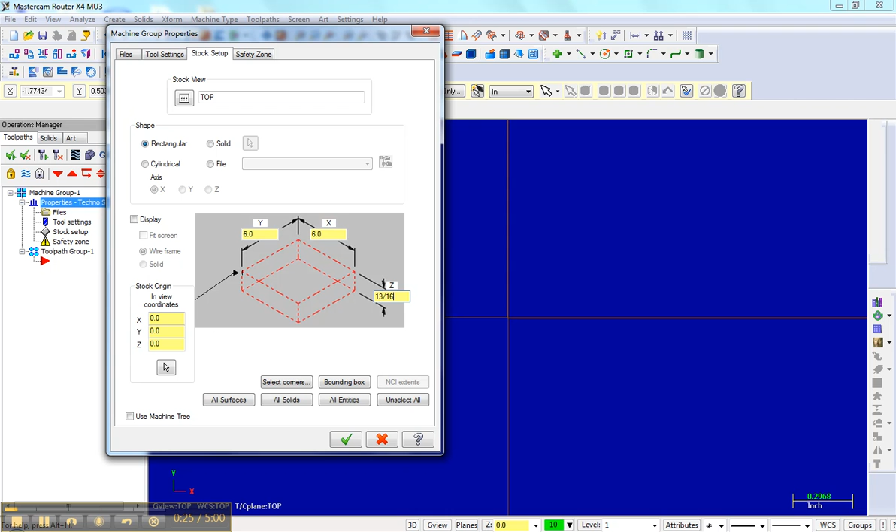Under properties, stock setup, I'm going to set my bit in my lower left corner. That's where I set it here. The dimensions of my board are 6 by 6, and actually that wood is 13/16 thick, so I'm going to enter that fraction. If I want to see it, I'll hit display.

Then I'm going to draw that. So I'm going to create a rectangle from the origin going up 6 and over 6. Snap in there, I'm done the rectangle.

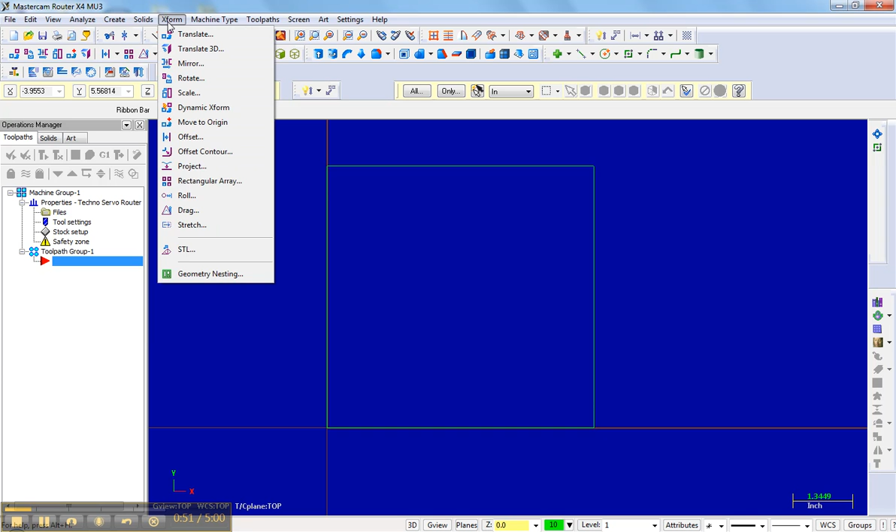Fit screen. I'm actually going to offset it so my bits stop a little bit before. So X form, offset, I'm going to offset a 1/2 inch, and I'm going to offset all these lines in here.

Then I'm going to create an arc from a center point. I'll snap it on that center point and draw the arc out maybe 3 inches. So I'll set a diameter of 3. Snap.

Escape, let me do that again. Here's my memory tool, so I'll go back to center arc. I'm going to set it at 5, with a 2-inch offset.

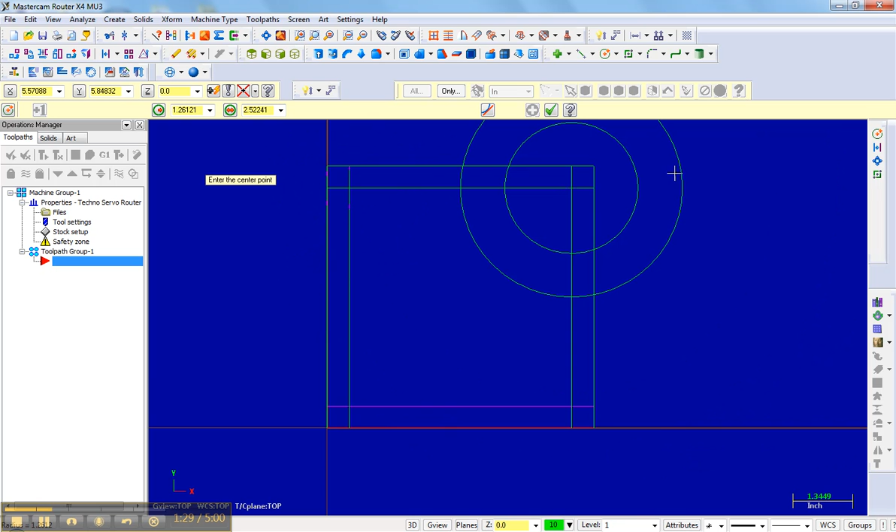Do that again, 5, this time it'll be 7. Nine. Let me do one more here.

Maybe 11. I think that's good, so I'm all done with my geometry.

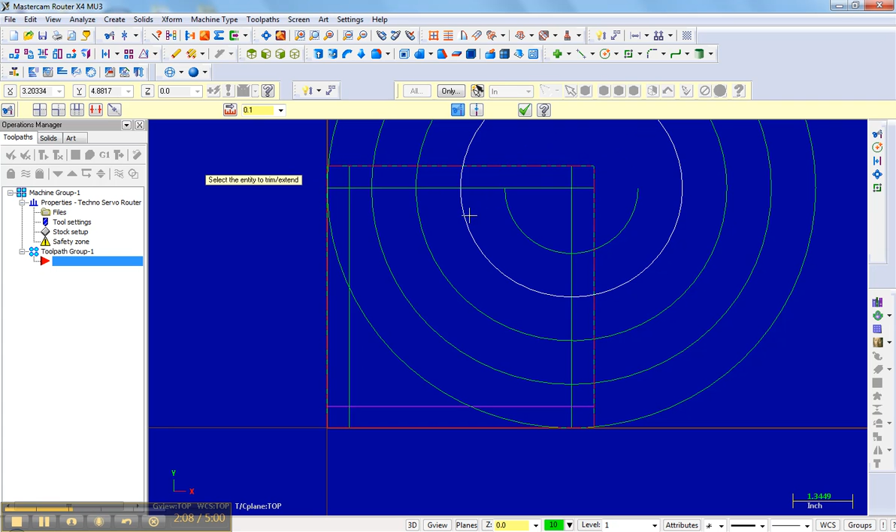Next thing I want to do is trim that geometry back to my offset line. So I'm going to trim this back to here, this to here, this to here, this. Then I also want to trim them to these offset lines.

When I'm all done trimming, I'm going to go back and erase all of these lines. I don't have to, I can leave them on here and not toolpath them, but I'm going to get these out of my way. And now I'm all done with my geometry.

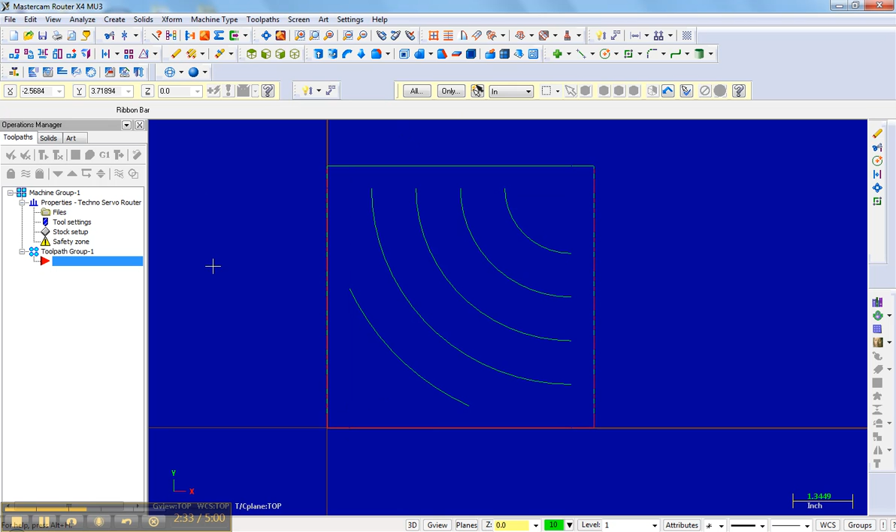Now I'm going to toolpath. I'm going to go toolpath, contour. I'm going to do a partial contour, and I'm going to start at the top.

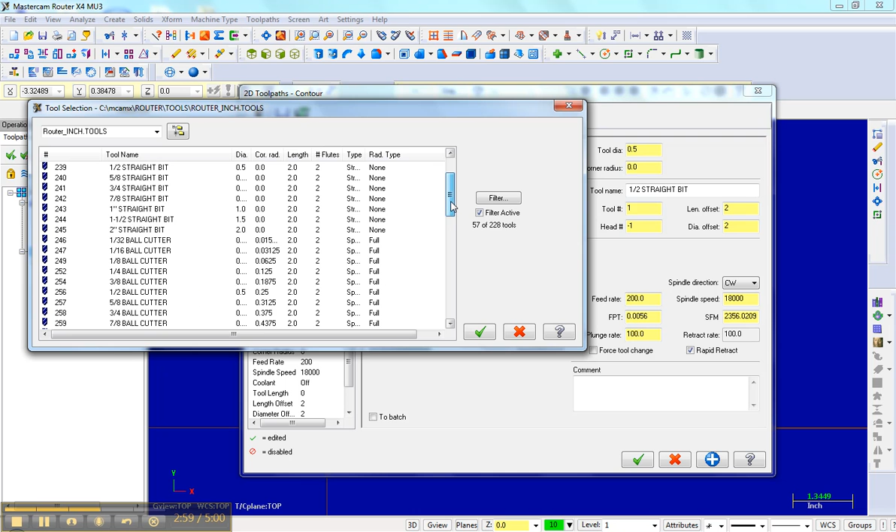And I'm going to actually run that router bit down the center. So I'm going to go to Tool, select a 1/2 inch ball end mill. There's a 1/2 inch ball cutter. Set my feed rate at 60, 30.

Hold those settings. Holder, cut parameters. I'm going to turn the cutter compensation off, so now the bit's running down the center of my line.

Depth of cut, very important. You set that at 0.2.

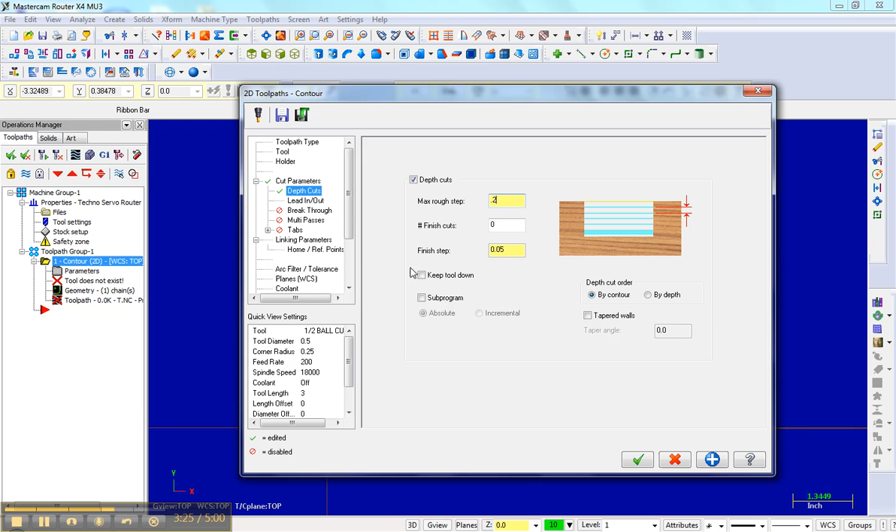Hold that setting. Lead in, lead out, it's going to be turned off. Breakthrough, multi-passes, tabs, linking parameters.

I'm going to go to a depth of -0.5. My wood's about 3/4 thick. Oops, I want to set that at absolute, -0.5. My wood's about 3/4 thick. If I go down to 1/2, I have about a 1/4 inch overlay in the middle.

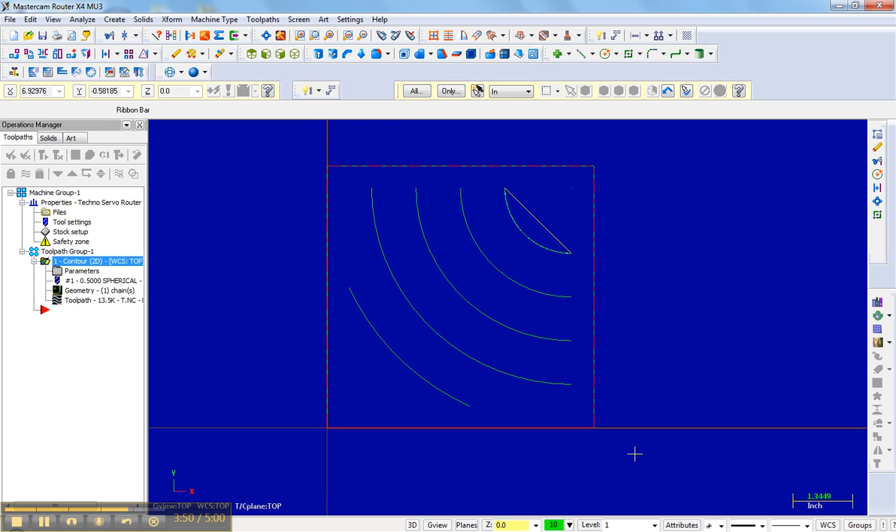Okay, so that's that. I'm going to go ahead and pause it here and do the rest of them the exact same way.

Okay, I'm all done toolpathing the 5 arcs. You can see them all 5 right here. I go up here to select them all.

If I want to verify, I go to verify. I like to see an isometric, fit screen, and then there they all getting cut.

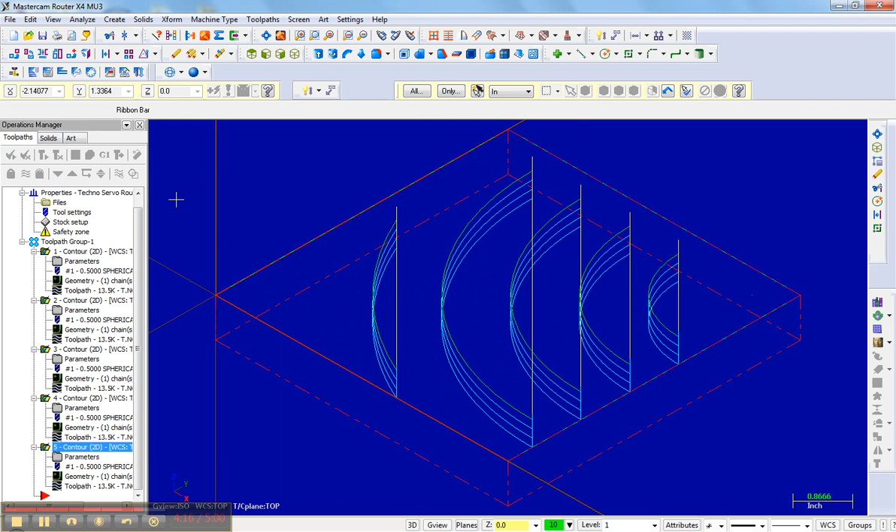And the last thing I do is after I check it, I go to post, Techno Servo, I double check that, and I want to post it to the flash drive. Here I'm just going to do it to the desktop. Make sure you name it with your name in it, and then it posts. And there's my code. Let's go out to the router and run the block.